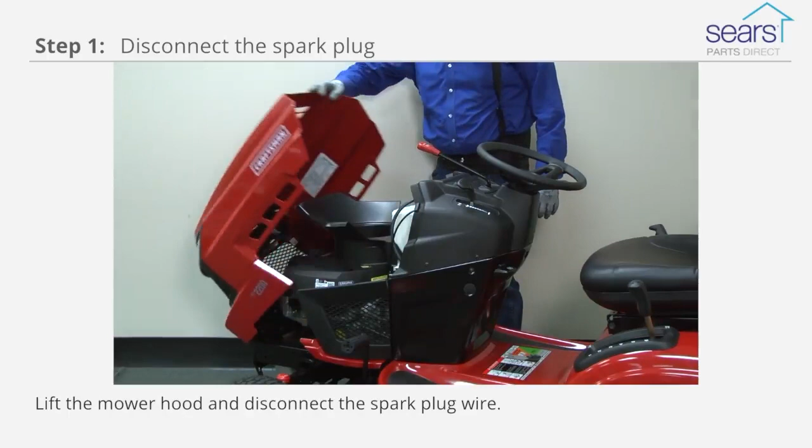The first step to replacing the mandrel assembly is to turn the ignition switch off and remove the key. Lift the mower hood and disconnect the spark plug wire. Lower the mower deck to its lowest position.

Disengage the cutting blades. Roll the blade belt off the engine pulley and release the belt from the belt keepers.

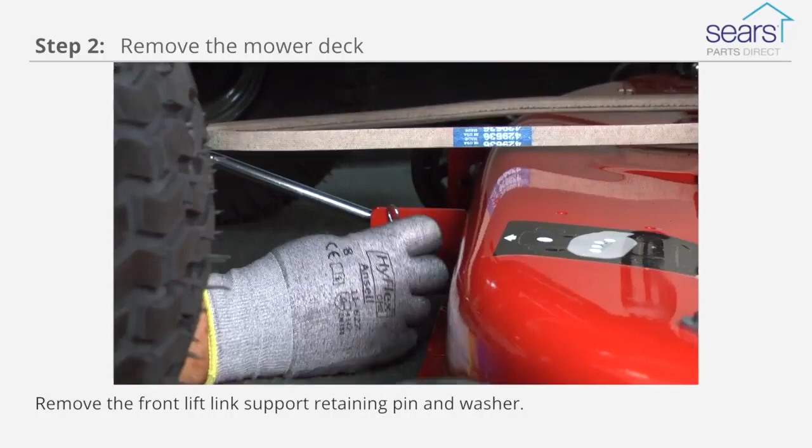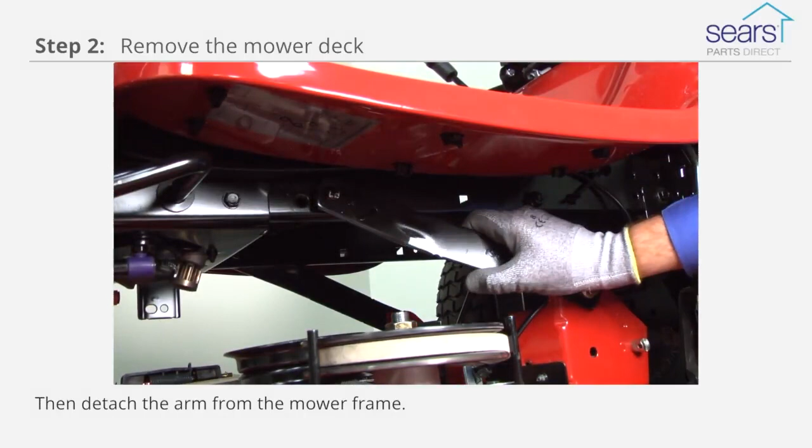Remove the front lift link support retaining pin and washer, and then detach the support from the deck. Remove the left suspension arm retaining clip and then detach the arm from the mower frame. Remove the left rear deck bracket retaining clip and washer, and then release the bracket from the deck.

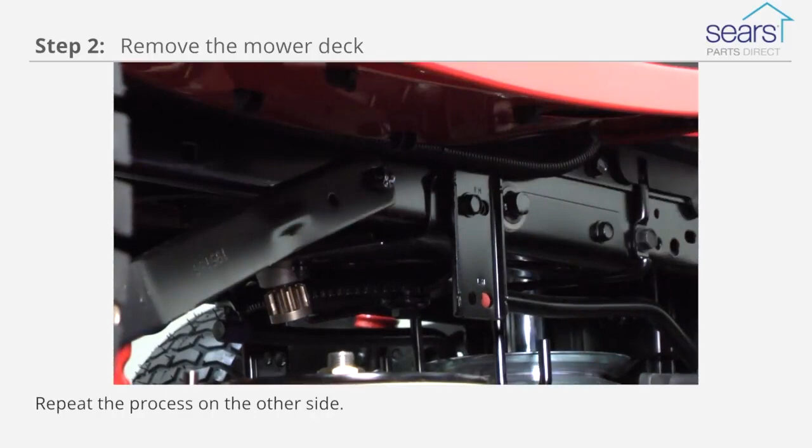Repeat the process on the other side of the deck to disconnect the right suspension arm and right rear deck bracket.

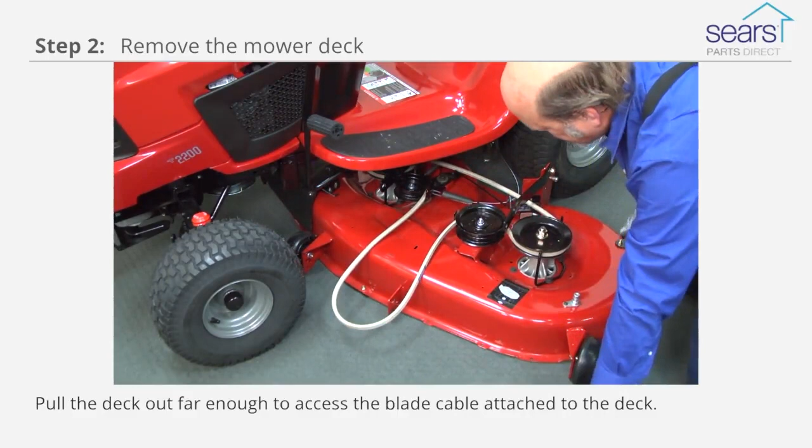Pull the deck out far enough to access the blade cable attached to the deck. Release the locking tabs and pull the blade cable out from the deck bracket. Disconnect the blade cable spring from the idler arm and move the cable aside.

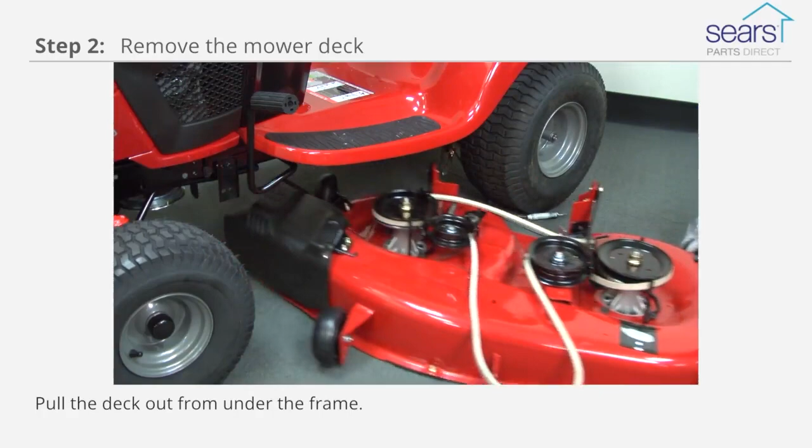Pull the deck out from under the frame. Put a wood block between the blade and mower deck to keep the cutting blade from moving. Remove the pulley mounting nut and detach the pulley.

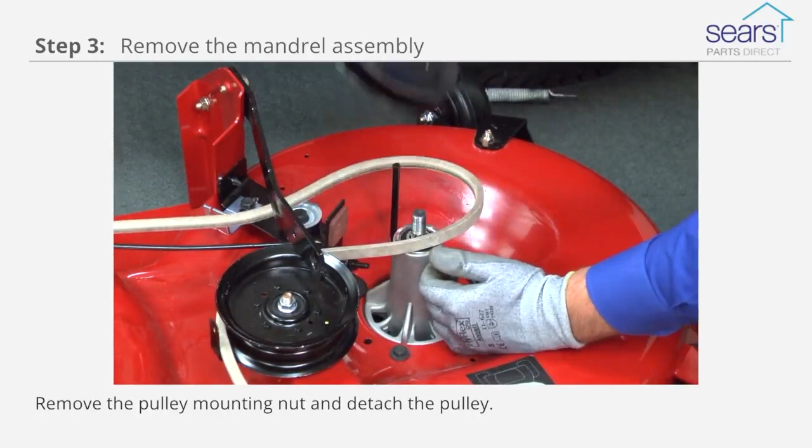Pull out the wood block and flip the mower deck over. Put the wood block back in place. Remove the blade mounting bolt and pull off the cutting blade.

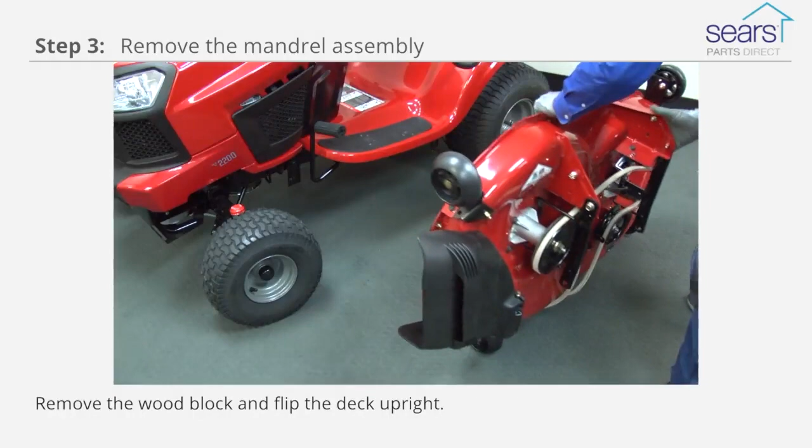Remove the wood block and flip the deck upright. Remove the mandrel mounting bolts and pull the mandrel out from under the deck.

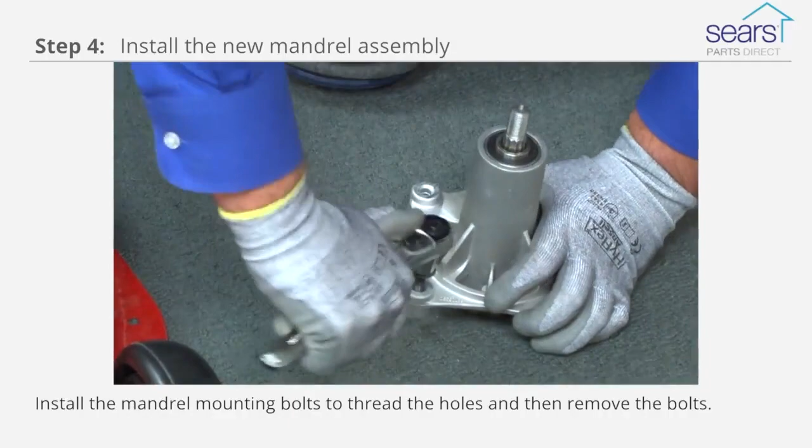Install the mandrel mounting bolts into the new mandrel to thread the mounting holes, and then remove the bolts. Position the new mandrel assembly in the deck opening and install the mounting bolts. Tighten the bolts firmly, and flip the deck over.

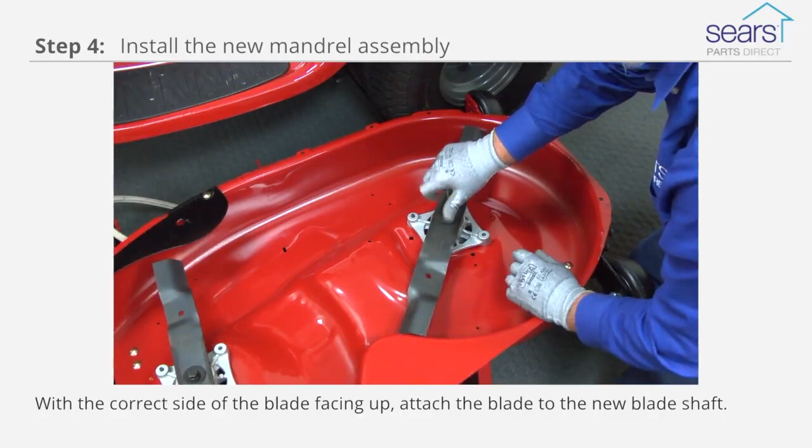With the correct side of the blade facing up, attach the blade to the new blade shaft and hand tighten the blade bolt. Put the wood block back in place and tighten the blade bolt firmly.

Remove the wood block and flip the deck upright. Put the wood block back between the blade and the mower.

Reinstall the pulley on the new mandrel assembly with the blade belt properly attached to the pulley. Tighten the mounting nut firmly.

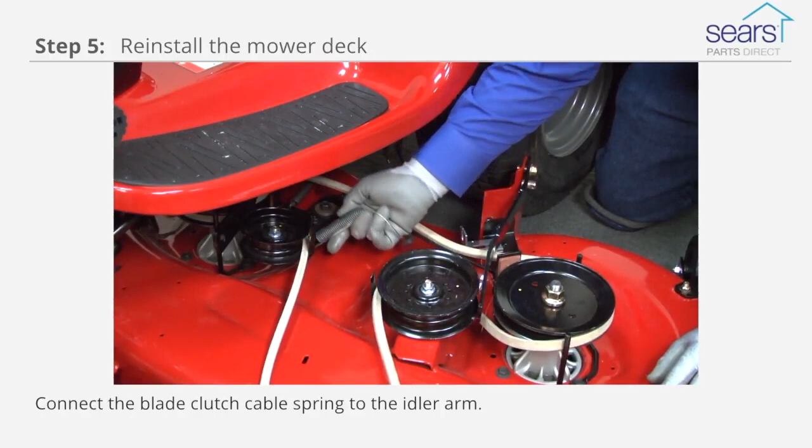Remove the wood block. Push the deck near the mower frame. Connect the blade clutch cable spring to the idler arm. Push the blade clutch cable retainer into the deck bracket and engage the locking tabs.

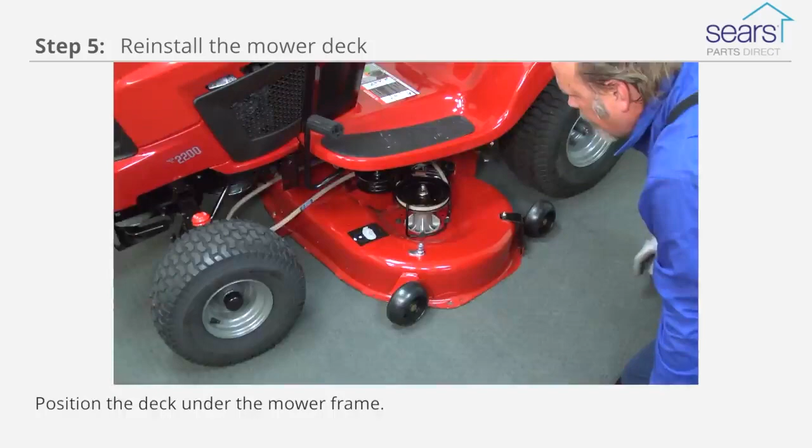Position the deck under the mower frame. Reconnect the front lift link support to the deck using the washer and retaining clip.

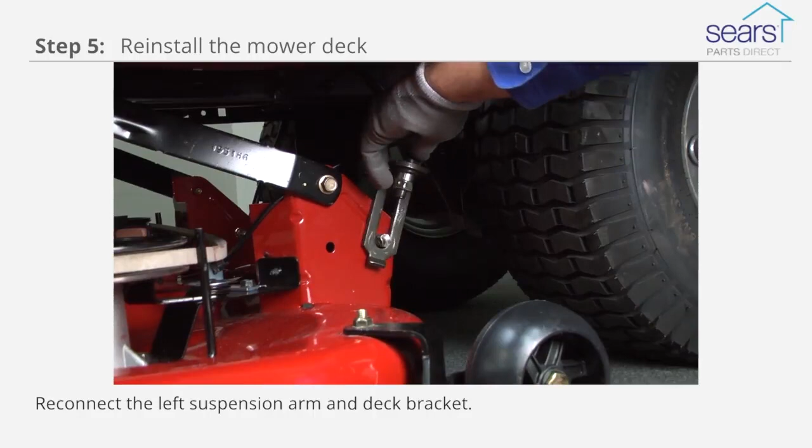Reconnect the left suspension arm and deck bracket using the washers and retaining clips. Repeat the process to reconnect the right suspension arm and deck bracket.

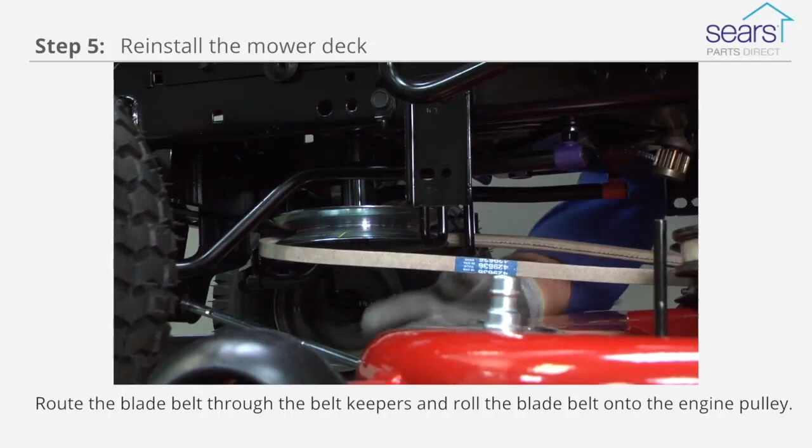Route the blade belt through the belt keepers and roll the blade belt onto the engine pulley. Reconnect the spark plug wire and lower the mower hood.